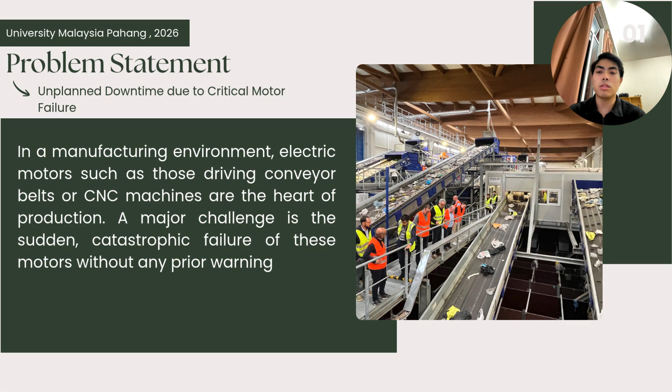The problem that we had is the unplanned downtime due to critical motor failure. In a manufacturing environment, electric motors such as those driving conveyors, as you can see in the picture that I put on the slide, conveyor belts or CNC machines are the heart of production. A major challenge is the sudden catastrophic failure of these motors without any prior warning.

So the issue that we had is that failures often stem from internal mechanical degradation such as bearing wear, shaft misalignment or stator winding faults. These issues are invisible to the naked eye and cannot be detected through routine visual inspection until it's too late.

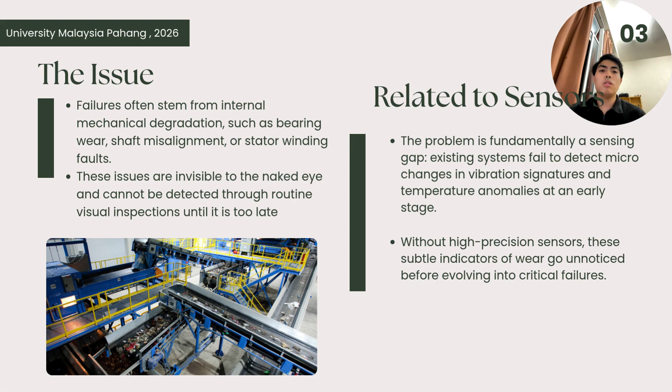Another issue is related to the sensor. The problem is fundamentally a sensing gap: existing systems fail to detect micro changes in vibration signatures and temperature anomalies at an early stage. Without high precision sensors, these subtle indicators of wear go unnoticed before evolving into a critical failure.

And we jump straight to the impact on production and quality. There are three of them. The first one is a production halt. Sudden breakdown leads to immediate unplanned downtime, causing significant financial losses every hour the line is stagnant. Second is a safety risk. Extreme motor failures such as overheating or mechanical fragmentation pose a direct physical risk to operators on the factory floor.

The third one is product defects. Unstable motor vibration before a total shutdown leads to machine inaccuracy. Misaligned cuts or improper assembly are examples, compromising the quality of the final product. I think that's all from me. The rest will be continued by my group members. Thank you.

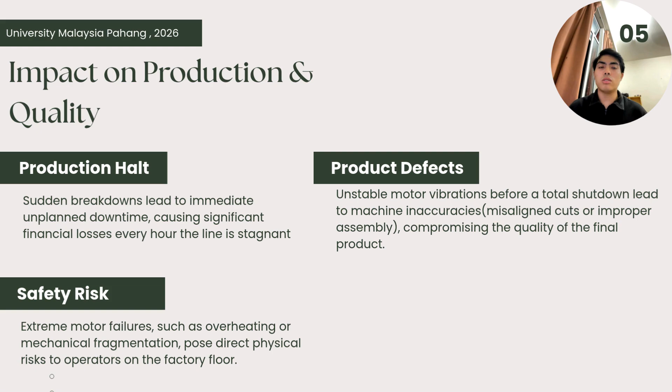Okay, for the method of the current system, sometimes we use temperature sensors, RTD or thermistor, to detect the motor heat, and also use current sensors to detect any overload or abnormal power usage, because sometimes when the motor is broken it will drain more power, so we can detect from that. And some machines also include basic vibration sensors. So when the motor vibrates abnormally, it will show the problem.

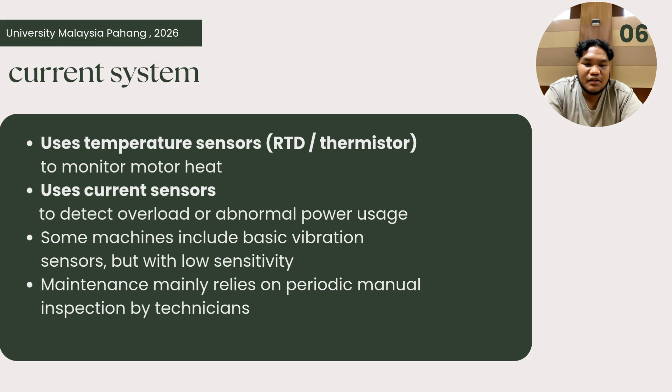And also, maintenance mainly relies on periodic manual inspection by technicians. Sometimes it's scheduled checking, such as once a month or twice a month. But the weakness of this method is sometimes we cannot detect early stage faults like small bearing wear or slight misalignment. We only detect when the problem is too big, and the temperature and current changes only appear when damage is already serious. So if we detect the damage from the temperature, the motor is already at a broken stage.

And limited real time monitoring depends on manual checks. Also, basic vibration sensors cannot capture small vibration changes because of low sensitivity. So any small change cannot be detected, and over a long period, the motor will be damaged. This also results in unexpected breakdown, downtime, and higher maintenance cost. If a motor breaks, the company will stop production, and it will cost in maintenance and also sales.

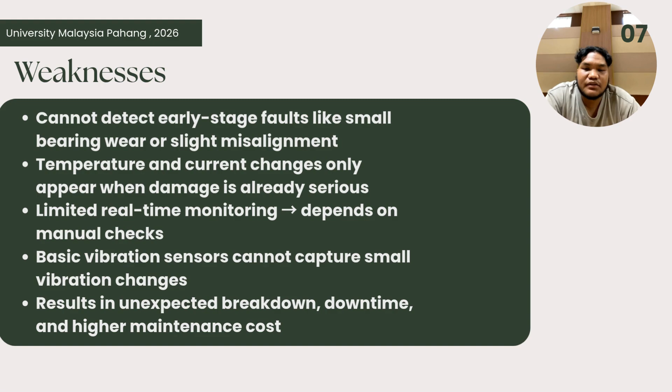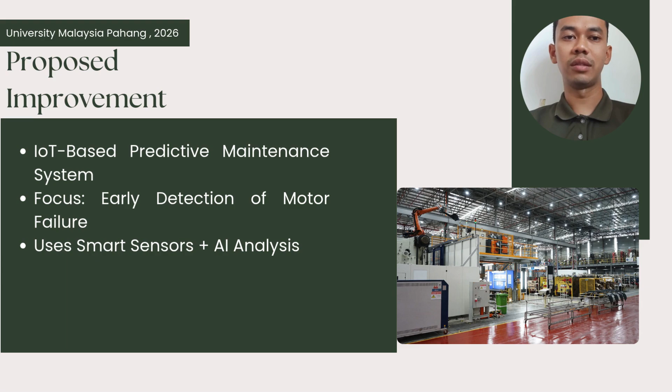Okay. Now I will present the proposed improvement to solve the motor failure problem. The solution is an IoT-based predictive maintenance system that focuses on early fault detection using smart sensors and data analysis. For the proposed technology, this system uses high sensitivity vibration sensors, specifically MEMS accelerometers, to monitor motor condition. It is connected to an IoT platform for real-time monitoring and uses AI or machine learning to predict possible faults. Unlike the current system, it operates continuously without manual inspection.

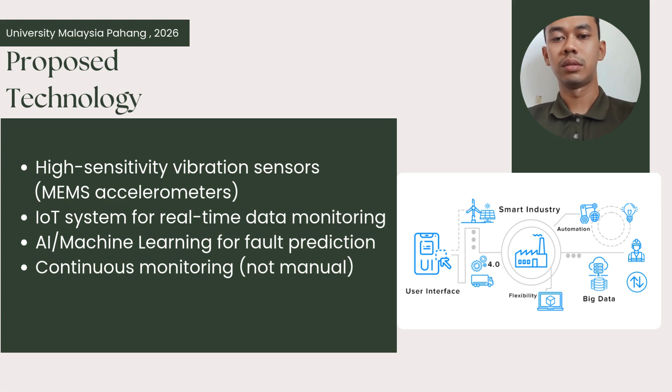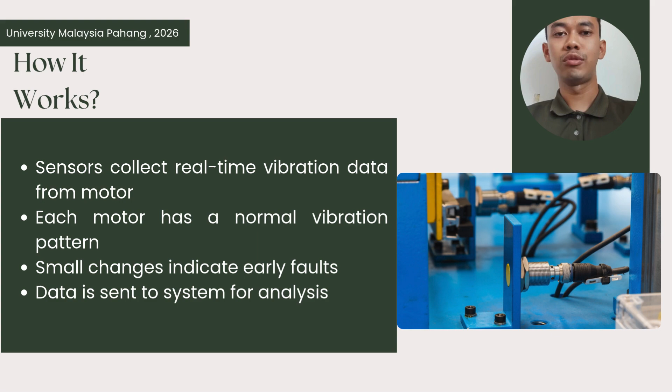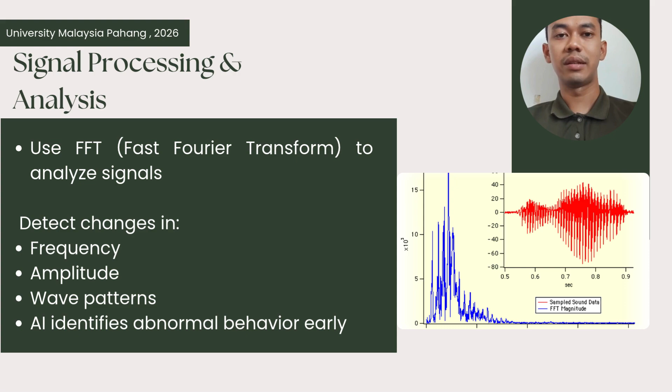Next, the sensors collect real-time vibration data from the motor during operation. Each motor has its own normal vibration pattern. When a fault starts to develop, even at a small level, the vibration pattern will slightly change. This change is captured and sent to the monitoring system. The collected data is analyzed using techniques like fast Fourier transform or FFT. This helps detect changes in frequency, amplitude, and wave patterns. AI algorithms then identify abnormal signals and predict potential failures early.

Next, why is this solution better? This solution is better because it can detect faults at a very early stage, even before major damage occurs. It is more sensitive than current sensors, provides real-time monitoring and reduces delay in detection. Most importantly, it predicts failures before they happen. In conclusion, this system solves the sensing limitations in the current setup. It changes maintenance from reactive to predictive, which improves motor reliability and overall system performance.

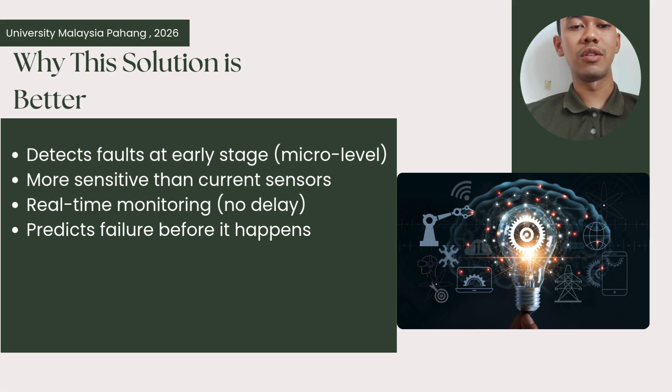Okay, so now I'll be talking about the benefits. The first benefit is elimination of the sensing gap. By utilizing industrial grade MEMS accelerometers, the system can detect micro level changes in frequency and amplitude that are invisible to the naked eye. This allows for the identification of early stage bearing defects and shaft misalignments that existing low sensitivity sensors fail to capture.

So benefit number 2 is drastic reduction in unplanned downtime. The ability to predict potential failures before they become critical shifts the maintenance strategy from reactive to predictive. This prevents sudden breakdowns and avoids the significant financial losses incurred during every hour the production line is stagnant.

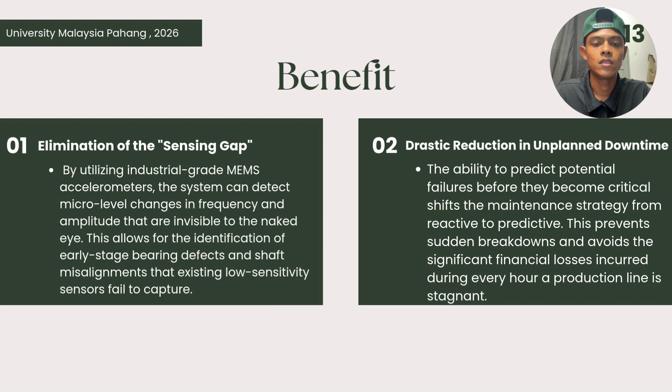Okay, benefit number 3 is protection of product quality. Early fault detection ensures maintenance is performed before unstable motor vibration causes machine inaccuracy. This prevents misaligned cuts or improper assembly, maintaining high quality for the final product. Okay, the last benefit is enhanced operational safety. By preventing extreme motor failures such as overheating or mechanical fragmentation, the system directly reduces physical risk to operators and the factory floor.